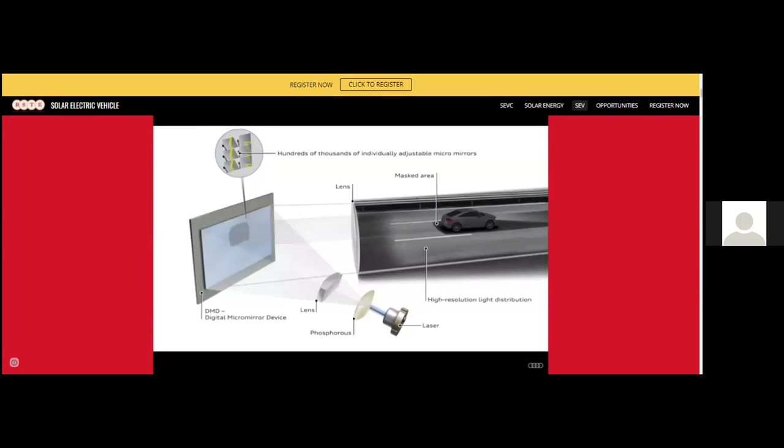Instead, Audi is investing in even newer, forward-thinking light technology: laser lighting. Matrix Laser Light takes the Matrix concept further by promising increased efficiency, precision, and road distance vision never before thought possible. While LED headlights have up to 50 segments to individually control, laser headlights can have over 100,000 individually controlled illuminated segments for ultimate vision.

Imagine not just being able to warn a pedestrian of the vehicle's presence, but being able to detect a potential outside hazard to the pedestrian and digitally paint a warning directly in front of him. That, along with doubling nighttime visibility, are just some of the ways laser light continues the Audi tradition of pioneering the auto industry.

This is the future illuminated. This is Audi.

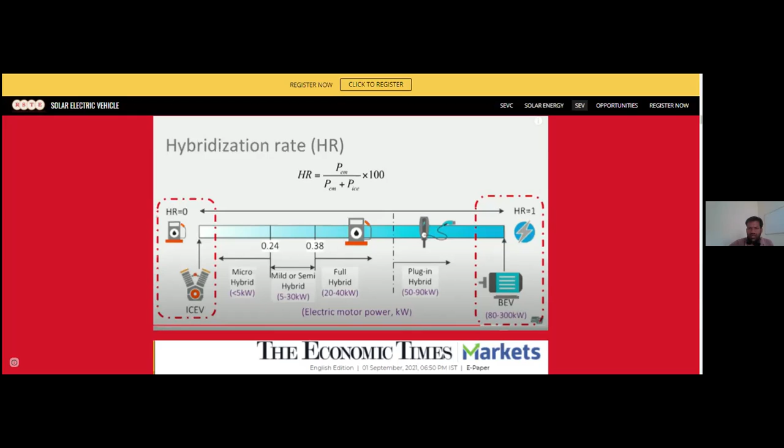I want you to know what the current crude oil prices are in the world market. Can anyone suggest to me? I am in the chat box. What is the current crude oil price? As I told you, I started my presentation with the current prices of petrol in India, so can anyone type in the chat box if it's open?

I cannot see the chat box. Till then, let me just take a cup of water. Chat box is open, yes. Can someone type the crude oil price? Crude oil price is 70 rupees per liter. Amit, okay, you are very close, but let me see some more answers.

Shall we continue without wasting time? Say yes or no, I need to check whether you are listening. Good morning sir, yeah Suresh is here. Good morning. Many of you fellows know me, so might be. Yes sir, we will continue. Okay so the current, good morning. Good morning, we got 90. Tejas Deshpande should be yes. Okay, just wait a while.

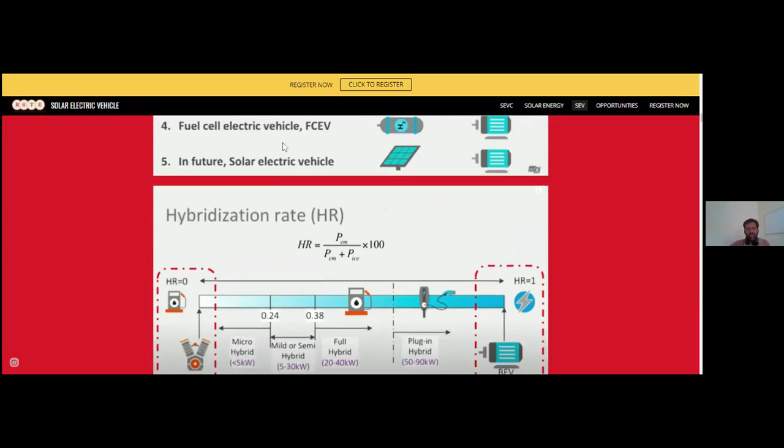We are starting with solar, that is my specialization. I've covered motor controllers in part, EVs and all, and after covering E-motors, I will cover the electric part as well. But we'll start with the future solar electric vehicle. We will cover this electric vehicle as well as solar.

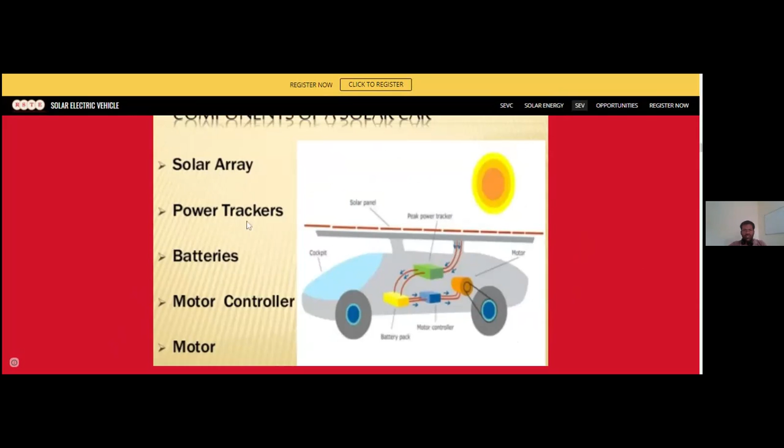So with this, I have covered the solar array part, almost with some calculations. Now we are moving slowly to motor selection. Motor selection will be decided based on the loads, and I have taken a reverse engineering approach - first we decide the solar panel, and then we decide for motor selection.

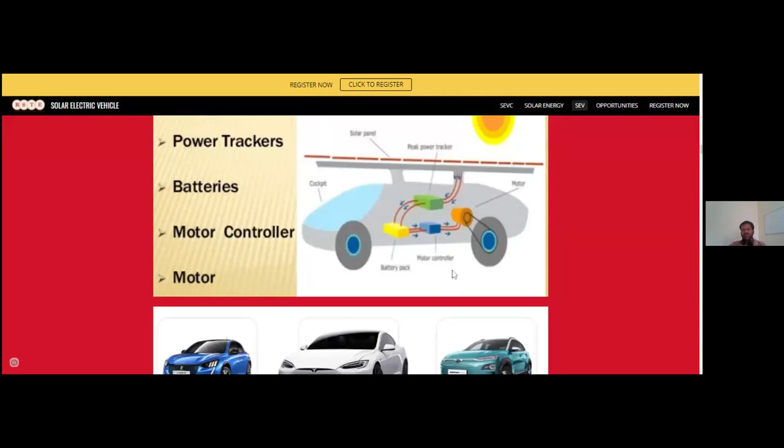So coming with this, I am giving you a quick example, but I have to ask questions from you, and lots of questions will be coming, and after that I will give you the answers. So coming with this, my second part is about to start. Before that, I wanted to take some questions from your side, and then we will move ahead, because we've covered almost 40 minutes.

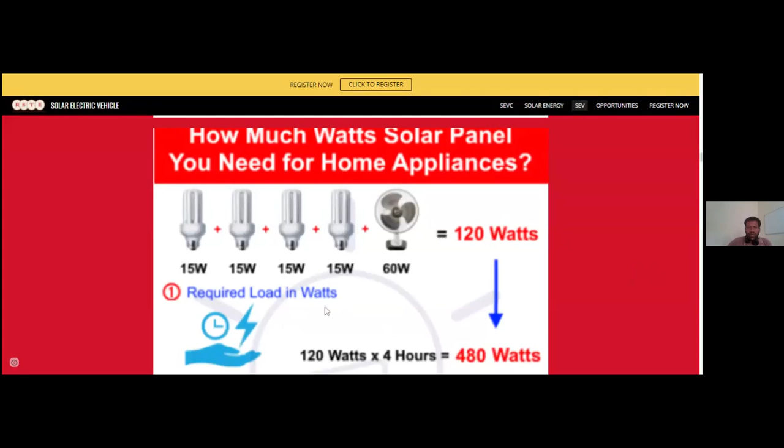Coming with this, the second part is required load in watts. If you have calculated, then you can see for how much duration that is coming in time-watts - how much duration we want this load to be used. I have taken an example: we are utilizing this for an average of 4 hours. So this 4 hours, when multiplied with the time, gives us the energy - there will be watt-hours. This is power, and this is energy.

Once you come with the energy, then we come with the energy balance. So coming with the basic calculation, 480 watt-hours is the energy part we need for 4 hours. We have decided our needs.

Then come with the solar part - for how much duration in your region the sun is there, and how much energy the sun is generating. I have taken some facts and figures, considerations in India, on what parameters we design solar power plants. So this 480 watts is again divided by the average sun availability of 6 hours, because in the morning or evening the irradiance will be less at that point of time, and we are unable to generate maximum efficiency through the PV cells.

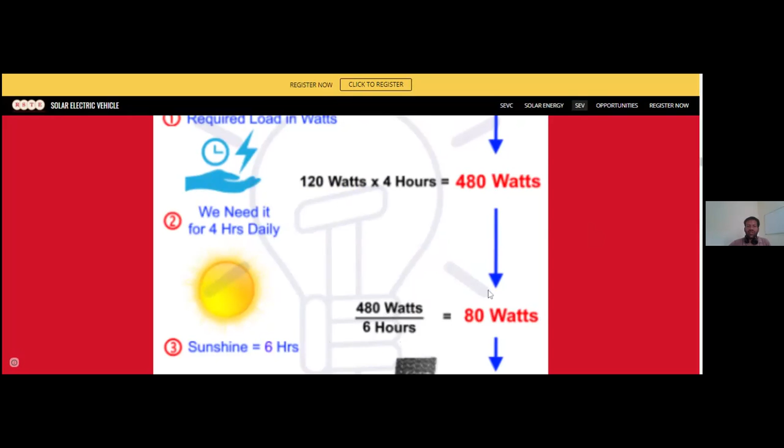As I told, the PV cells are designed on perfect parameters in STC, standard test conditions. So this 480 watts will be divided by the 6 hours, and this will give us 80 watts. So the third factor we considered is sunshine for 6 hours, and at the last we need an 80 watt solar panel.

This is a small calculation which I have taken for you, so you can understand and take out your own loads as well. You can design particularly how much solar power plant you need for home use, based on your load. You can give calculation for your fridges as well. I am giving an example.

If you don't want to spend so much on a survey, many queries come to me: sir, how many panels do we need for our own house? There is a particular device for the solar part called a current ampere meter, which can be utilized on an induction basis.

I will take an example. You can go to your electric meter part and check it out. Even on a monthly basis, you can find out how many units you are consuming, and convert them, since 1 kilowatt hour is particularly 1 unit. So from your monthly utilization, you can calculate how many watts of panels you will need for this energy.

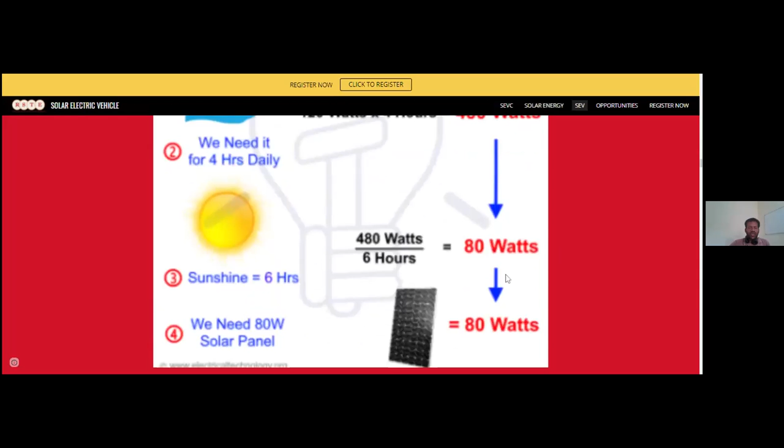The unit will be kilowatt hour, as household electricity is also measured in kilowatt hour, that is an energy. From there, you divide it by 6 and you will easily find out how many panels you are utilizing. So this is a very basic example.

What are the parameters you need to consider while designing? Because when the solar electric vehicle came, the most important factor was which orientation we need to adopt. Here, the power required for the entire orbit is 206.5 watt-hours. That is what we are getting in Earth orbit.

Then, the efficiency of the solar panel we are utilizing is only 0.18, as I've taken some assumptions here. The sun flux constant coming to the earth is 1367 watts per meter square. This is the radiation energy coming from the sun, an area where particular radiation reaches our earth, and we can utilize this energy in two sources: one is heat and another is light.

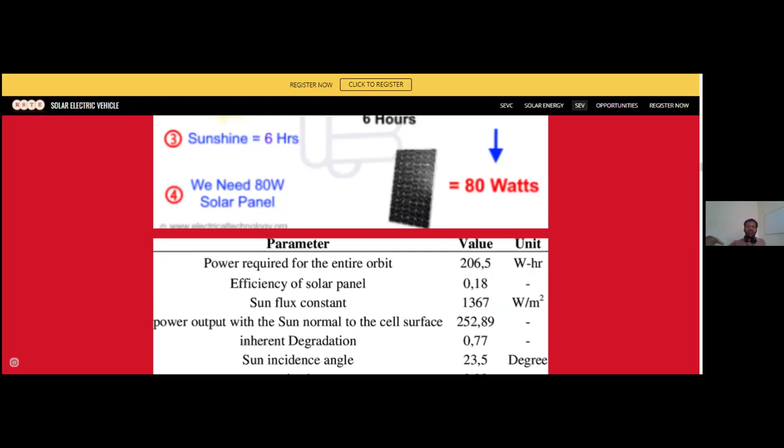In our EVs and solar electric vehicles, we are utilizing only a part as electric. Some solar electric vehicles utilize it as heat, they generate boilers in water, and after that run the motors. So both can be utilized, that depends on your usable part.

Power output with the sun normal to the cell surface is 252.89. So if you say power output with the sun normal to the cell surface, it means at 90 degrees this unit will hold. Inherent degradation, this is called the radiance.

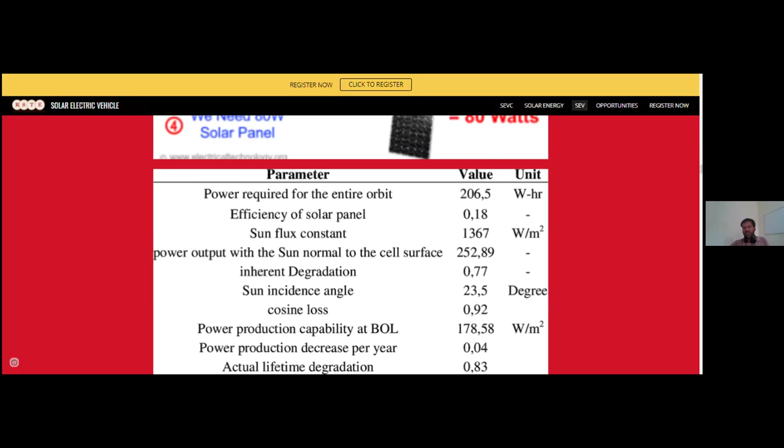Inclination towards the earth is 77. Sun incident angle which we have called is 23.5 degrees. Cosine loss, we have also gone with a particular factor, we call it 0.92. So if we incident at 23.5 degrees solar panel, as you see in rooftops or colleges, they generally utilize this angle because it's general in India. 0.92 is the cosine loss which has been covered.

Power production capability at BOL is 178.58 watts per meter square. This is the cell surface that is coming, and this is how we can utilize it for our services. Of this 178.58, 0.18 will be utilized, and that comes close to the efficiency of the PV cells we are utilizing.

Power production decreases per year because every year the temperature is increasing, global warming is increasing. As I told, these are decided under STC, standard test conditions. Now the normal temperature comes up to 30 degrees Celsius rather than 25. We utilize ACs and all, but that doesn't matter, the global warming temperature will become 27 to 28.

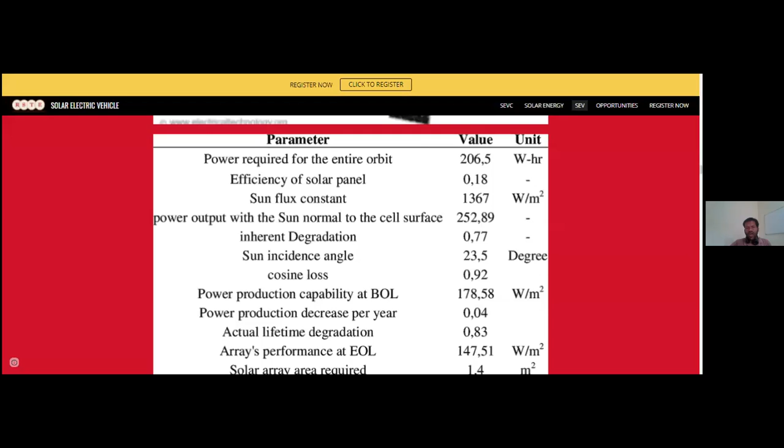So we are increasing it, and that's why power production - the PV cells will be very much heated, and it is also a problem for solar power plants. So we are decreasing by 0.04. Actual lifetime degradation is 0.83, because when a solar panel is designed, it is designed for 20 years, so year by year efficiency decreases and degradation will be 0.83.

Array's performance at EOL is 147. When PV cells are connected together we call it an array, connected with bus wires and fuse wires - these are thick wires which connect the solar cells. They come with 147.5 watts per meter, and the area required will be 1.4 meters square. So for 80 watts you need at least 1.4 meters square area. These are the types of factors I have taken in these calculations.

I hope this gives you a little information. Now let's come to battery life calculations. Battery life calculation is very much easy, I have not gone into depth on that. So you can design the solar cell this way - as I told, in all EV design, motor selection, battery selection, and solar selection, we are only balancing the energy.

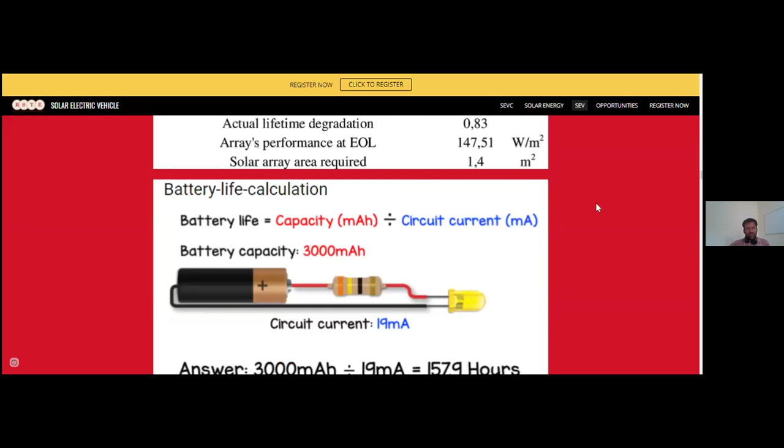Currently the trend, as you see, is thermodynamic first law - I've taken an example, so you can see we are always balancing our energy. Coming to this circuit current in milliampere, we are taking 19 milliampere of current, and a 3000 mAh battery capacity will stand up to 157.9 hours.

Battery life calculation is decided according to how much current your motors consume, and how much capacity your battery has. From this you can easily find out for how much duration your vehicle will run, and the motor will run on a particular power into hours - here you can find your battery can sustain that much current consumption up to 157.9 hours maximum.

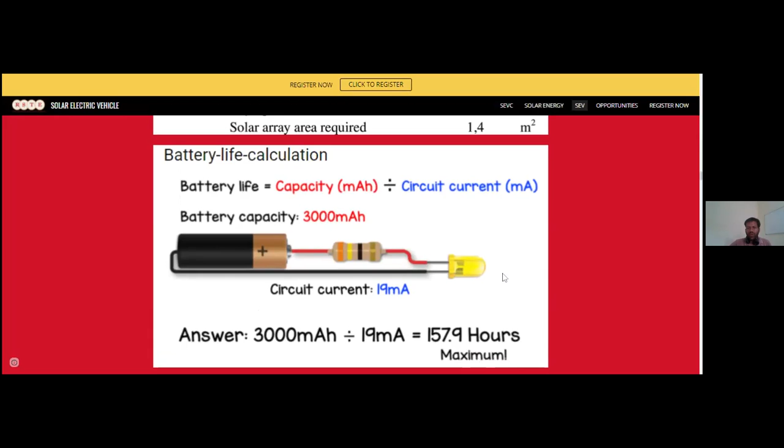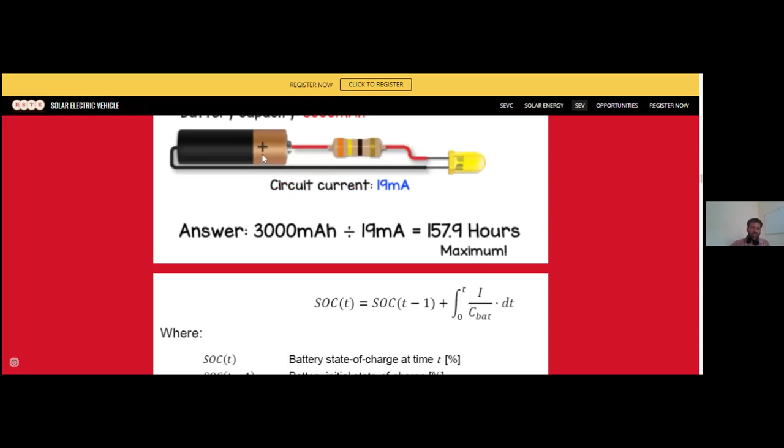The formula being utilized is SOC - we need to find the state of charge at a particular point in time, and SOC at t minus 1 is the initial state of charge. If a battery is 100% charged, we take it as 100%; if it's 80%, we take it as 80%.

So to find the point of charge we use the state of charge concept, and it depends on I, the charge and discharge current. As you see, load current is 19 milliampere - this diode uses 19 mA, so I have taken I as 19 milliampere. This is battery capacity in AH - here battery capacity is 3000 mAh, so you can directly use 3000 mAh.

Utilizing the time factor DT, time in hours, you find it through integration - you need to find these factors on a time basis, so that the state of charge is calculated and displayed to the user on your phone or display panel, showing how much charge is left in your vehicle.

These are some of the basic calculations for EVs or any vehicle which I have covered. Here I have not utilized PCM - PCM is a factor where you need to design the vehicle through its power as well as the curb mass. It's only a ratio - how is the ratio designed? It means the total overall weight of the vehicle without passengers, or as the vehicle is designed.

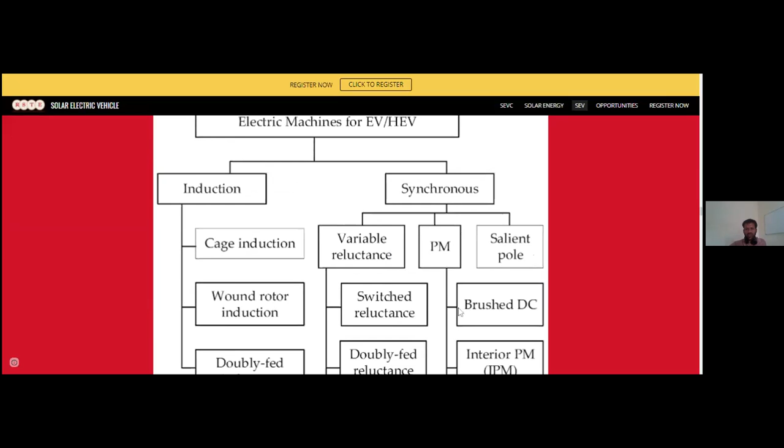So induction motor comprises of cage induction, wound rotor induction, doubly fed induction. Then synchronous motors comprise of variable reluctance, permanent magnet. Permanent magnet has been further classified into three parts, interior permanent magnet, inset PM, and surface permanent magnet. Whereas variable reluctance motors, I will tell you in the later part.

I think switched reluctance is now also in a research phase. Many vehicles are now searching for switched reluctance. Then we have doubly fed reluctance, synchronized reluctance, and hybrid PMS.

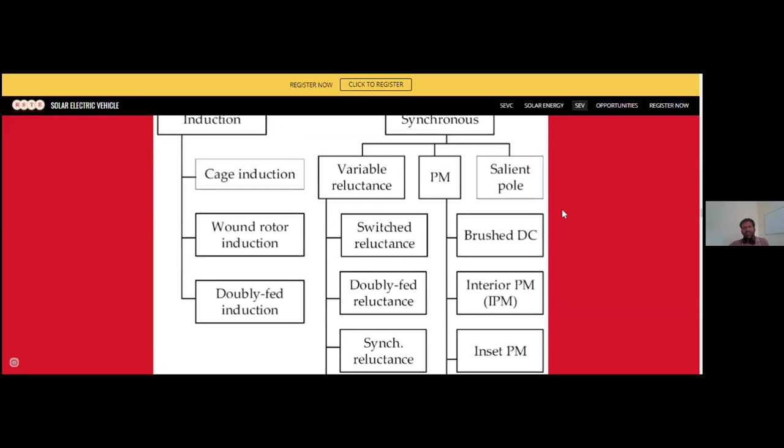Then I have not taken the BLDC, brushless DC motors, that we cover in the motor part, and that you can find down in Ola electric scooters. In any of the EVs, you can see electric BLDC is currently utilized. So that's why I'm not taking that part.

Different types of electric motors used in current EVs are, as I told, first and most important is the brushless DC motor. Why is it being used? What are the advantages you can find from various YouTube videos? But I am just giving you an overview.

Second, permanent magnet synchronous motor, which is also very trendy. Tesla also utilizes some AC induction motors because they are very good in efficiency, and cost is also lower than DC motors.

Then we utilize interior permanent magnet motor, that will be in go-karts and all. We are utilizing interior permanent magnet motor. We are using natural metals, right?

Then we have permanent magnet switched reluctance motor. As I told, this is also a future possibility, might work out or might not, but currently this is a very trendy motor. You can go to market and say, sir, I want a motor, they will only give this BLDC. How the circuit will be done, how a phase wire will be decided, you can go for that.

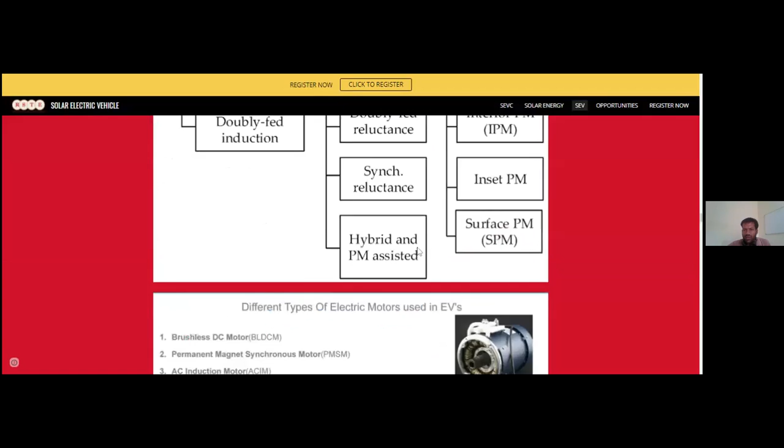It must be 480 watt hours. Gaurav is saying for the calculations. Just wait a while. Yes, 480 watt hours, yes yes, I think that is correct. 480 watt hours, hours have not been mentioned.

Can we install a solar system in apartments on a common terrace? Can any issue be raised by the apartment committee? Is it right, Ramesh sir? Let's see about the solar system in apartments.

So apartment consists of flats or duplexes. Initially at your house you can install it, and there is a particular ministry that is going to do a survey. They will come to your home and check whether your apartment is fit. Generally, the requirement is that there should not be any tall buildings nearby so that the area is free from shaded regions.

Second, in your region, like suppose a coastal area, if you are installing the solar system, it may get damaged due to rusting.

And regarding any issue raised by the apartment committee, that completely depends on your committee, as I told you. I haven't found this issue in many of the duplex committees. I am also residing in Windsor Beach, and at that point of time I could see many persons utilizing solar systems. So there is no legal formality as such, but many societies have their own presidents and vice presidents who take care of maintenance in that regard.

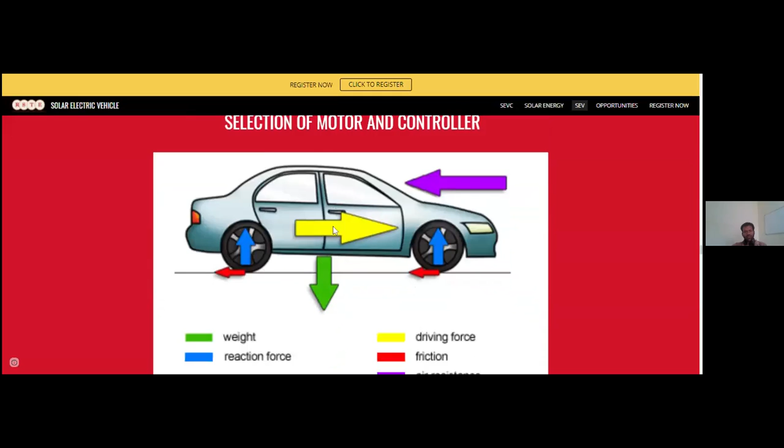Coming to this, I hope you have already taken a glimpse of various aerodynamic forces and factors, but I have only covered a few of them. So weight is the major factor in vehicle design, and once vehicle load is decided, the motor will be selected. Then we have reaction force, driving force decided through motors, friction force from the road and tires, and air resistance.

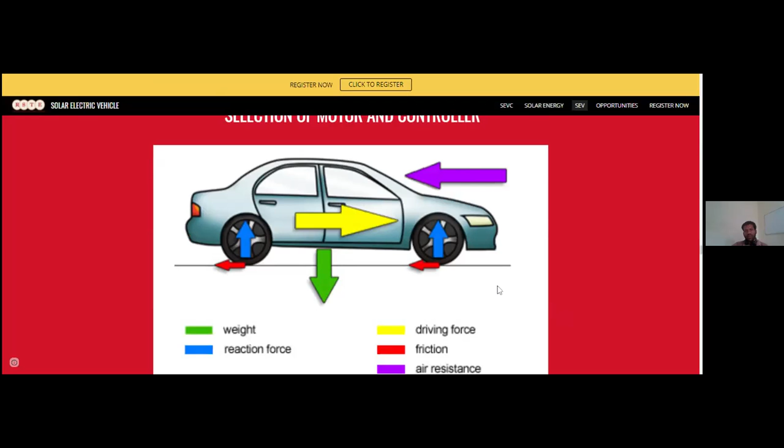So these are the five forces we consider while designing the motor. Once your load is calculated - I hope this was already covered in the aerodynamics section since I see it in the itinerary, so I have not given the calculations here - I am now strictly moving to the motor part, how it will be decided.

As you see, this was the basic setup. Right, as you see, the motor is the heart of the EV. It is charged and it drives, particularly converting electrical energy to mechanical energy.

Basic definition: we have two components, the rotor and the stator. This rotor and stator are connected to bearings, and the bearings move to the transmission, right? So this is how we design the motors, and motor selection affects this. This is a very basic diagram for the motor I have taken.

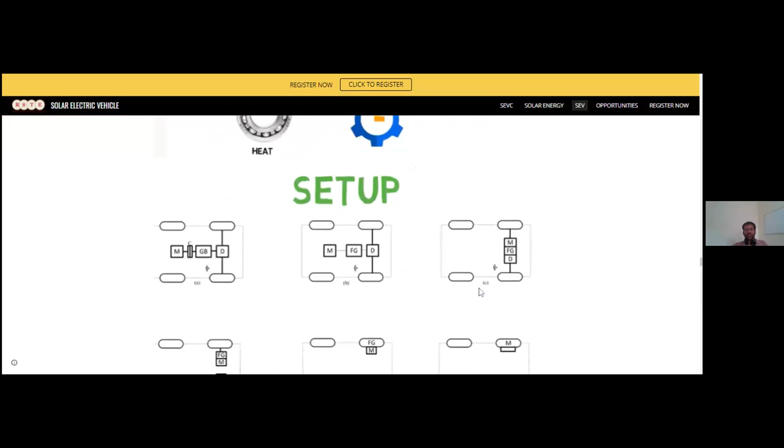Now coming to this, how the setup is generated. I think Gaurav's question will be answered, about how many motors we are using. That depends on vehicle usage. Currently we have 6 types of arrangements in vehicles, which you will find out.

So the first arrangement is this: motor will be placed, then clutch, then a gearbox and a drive shaft. This is the first setup for an electric vehicle, right?

Second setup, let me enhance my screen. Okay, in the second setup, motor is placed and we eliminate the clutch, and then we have a fixed gearbox and drivetrain. You can see it here. The benefit is eliminating the clutch part - this looks like a scooty wheel, the drivetrain is automatically controlled, transmission parts are reduced, and weight is controlled.

The third part is front drive vehicles, like many Renault and new electric vehicles you can see. They are integrated where the motor engages with the gear shaft, and then the drive shaft connects. So these are the three parts as I told.

This is a modified version where the motor is utilized in the midway, but here we only take the front part. As you see, hatchback cars and latest technology are using these types of arrangements.

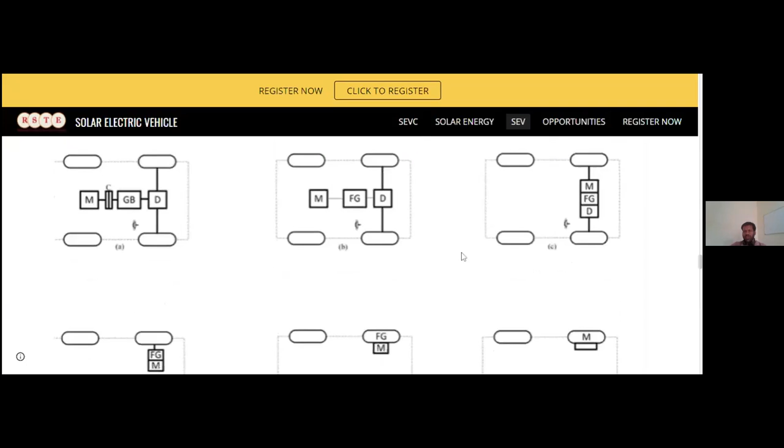Then we have the individual motor concept, where an individual motor is fitted in each wheel, with gearbox transmissions and FGB. Now, in a trendy way, you will find BLDC motors coming into play. These are individually BLDC motors fitted in the hub itself, controlled through electronics. This is a very trending approach.

It reduces almost all the parts in existing automobiles. The next part is the motor, as I told you. The last arrangement is where the motor can be utilized within the wheel itself, without a hub. It is a motor with a particular wheel, built into the wheel itself. We call it a wheel hub motor.

Coming to the first one, this arrangement has motor, clutch, gearbox, and drivetrain. Efficiency is very low here because most of the efficiency is wasted in the clutches and gearbox. But the advantage is in torque and speed adjustment - torque will be very low and speed will be very high.

The torque will be distributed here, and it can be manipulated. The biggest advantage in this arrangement is that you can manipulate the torque with the speed. When speed is less, you get high torque.

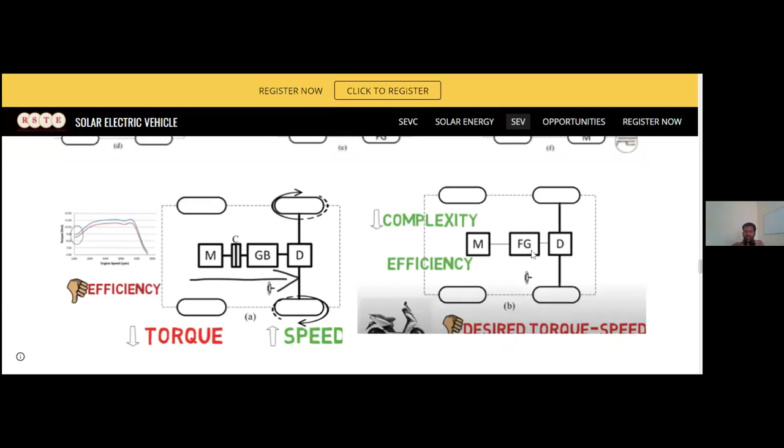Then comes the complexity factor. It has been reduced because here we have removed the gearbox and only the fixed gearbox will be utilized. Here, the desired torque and speed cannot be obtained and manipulated.

Third part, as you see in Toyota and other companies, they are utilizing the motor within the connection part and then the drive shaft, which is the front end gearbox. This part can be utilized in a drivetrain where the steering is done. So here both wheels will be in the back end and no other parts are required. Then it comes with the individual motor system, where a gearbox is fitted with a motor, and then wheels will be connected.

Here all the parts will be controlled through electronics, and speed and torque can also be varied, but the complexity is very high. That's why it is not really used much - the most usable part is this one.

The last type here has reduced the clutch parts as well. This is a modified version. Here we have used the motor part and gearbox part, and it directly runs on the wheels.

I've taken some factors into consideration. So what things are considered while selecting a motor? Three things: maximum efficiency we can get, and low cost that we want.

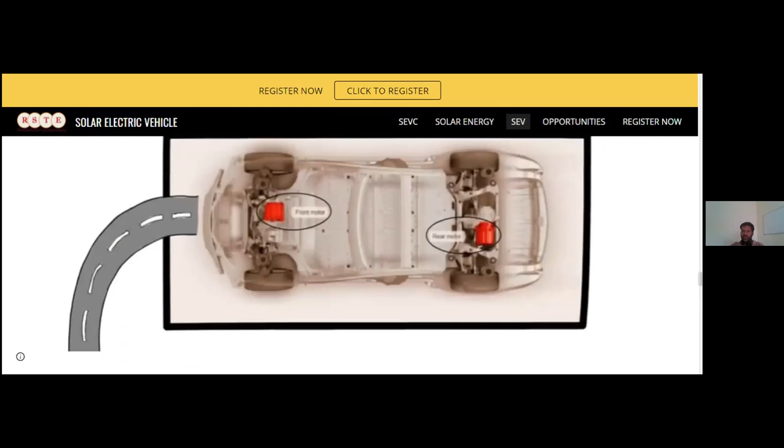The first two most important factors are torque and speed, torque and power. Torque will decide the motor. AC induction motors have less power but greater torque. If we compare, AC induction motors and DC motors both have power ratings, and the speed and torque can be varied accordingly.

Second parameter is power. While deciding the power of the motor, you can find the torque at a particular RPM - I covered this in the motor characteristics curve part. When you go to purchase a motor in the market, you will find a specification list. You need to check what is written: first, the torque rating at what RPM it gives maximum torque, and second, how much power is rated, typically in HP.

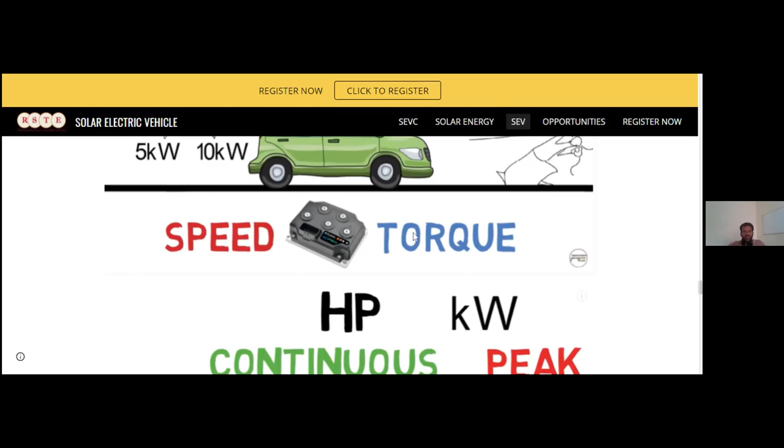Controller here, the parts will keep speed versus torque. They are maintaining speed and torque. Now you will find out all the things. Motor controller is being now replaced by vehicle control unit. So we are having continuous and peak.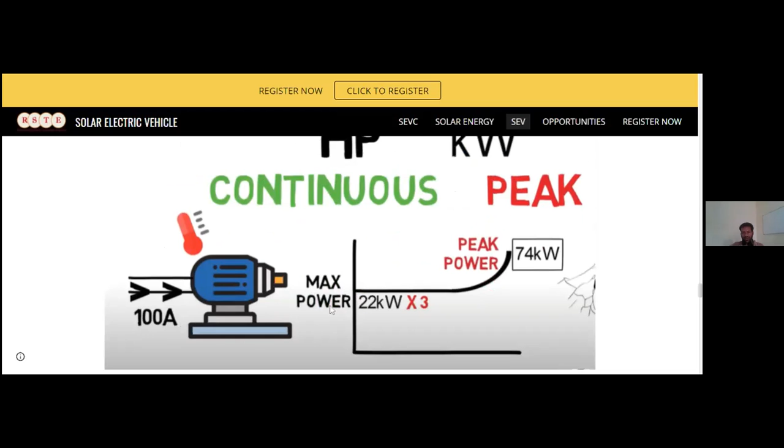Let's come to this motor. It is consuming the current for 100 ampere maximum power. So 100 ampere motor is consuming this. Then we call it 22 kilowatt motor we have utilized for one vehicle, and when it comes to the peak and the loads come, it can reach up to 74 kilowatt. So you can see up to 3 times the peak power will be done while designing the motor, so that their coils and all will not burn.

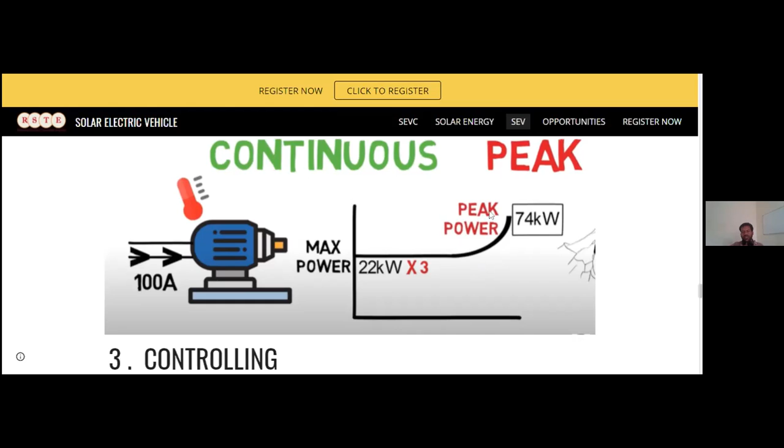But if you are running continuously at this peak power, this will be so much heated and motor can be busted out, which will be controlled through controllers.

Two factors I have taken are torque and power. And the basic factor which we think controlling should be very much easy while designing the motor, and that depends on the controllers. Generally BLDC is taking care for that. Second is the efficiency, how much efficiency we are having. BLDC is having much more efficiency rather than brush DC.

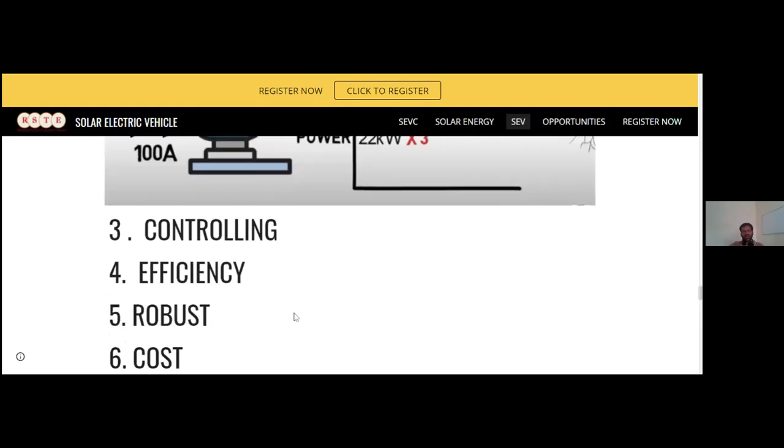Then we are having robust designing, because if you are using in automobiles, there can be accidental chances. So motor cannot burst, it will be hurt as I told. As an IC engine, particularly all things will be replaced. So we can also do replacements in EVs. Robust designing should be there.

And the last and the most important is cost efficiency. So as I told, if your engine cost is 1 lakh, we will try that all the systems will be done this way. Why are EVs currently higher rate? Because designing the EV is not a bigger deal. They can be at a lesser price as well, but the battery pack has a very high cost.

Although if you can compare the electric scooter to particularly gasoline bikes, you will find their price is less compared to gasoline bikes. But for passenger vehicles, a larger battery pack will be needed. At that point the price will go beyond.

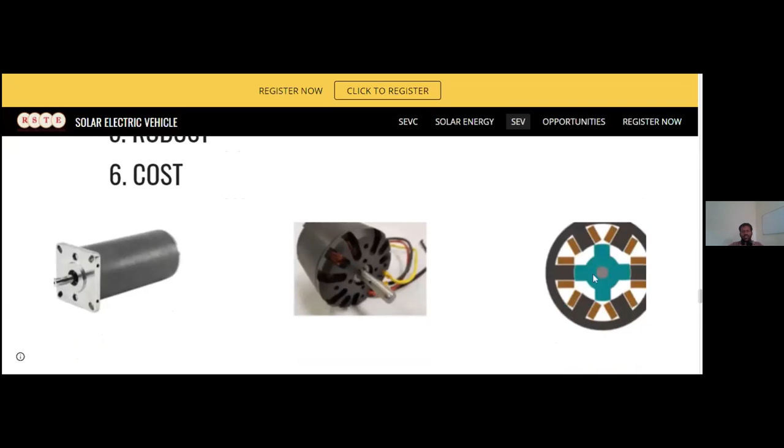Some of the motors I told about: these are DC motors, these are BLDC motors, and this is a switched reluctance motor. I have taken examples. This is an AC induction motor, and this is a stepper motor. I have taken a few examples, and here you will find some of the examples which I have taken.

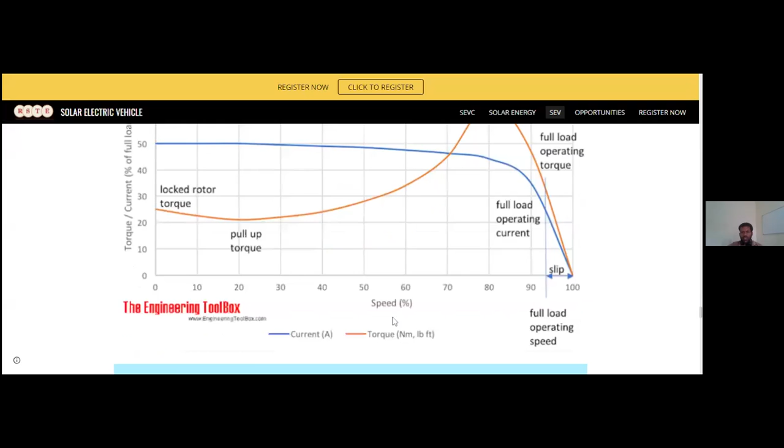So you can see torque will vary, and once torque varies, the speed - this blue chart - will be coming, and this is the amount of current consumption. So at a similar point of time, when high current is required, you need locked rotor torque, and when breakdown torque is given, the current will be much less. After this, it becomes full load operating current and full load operating torque. These are the two curves I have taken for you. Speed can be varied from here, and once speed varies, these are the changes you find in current and torque in the motor. I have taken these references from an engineering toolbox.

Coming to this, how will the controller be done? I have covered all the parameters of how motor selection is done. I hope it is clear to you. Now we come to the speed and torque part.

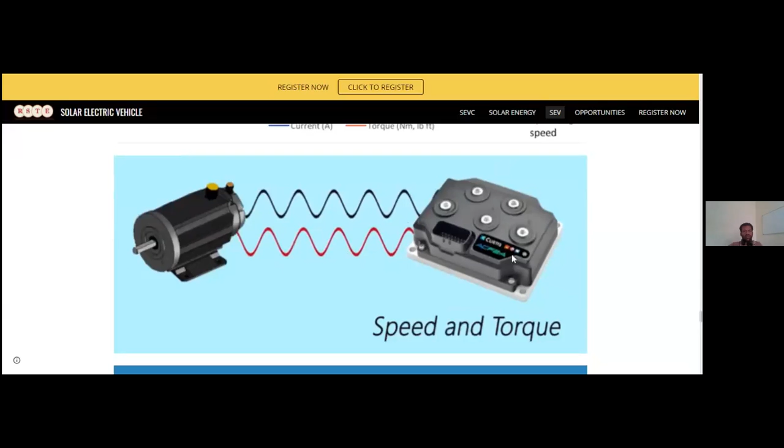As in vehicles with gasoline engines, the IC engine controlling part is done through ECU, engine control unit. In electric vehicles, we control through VCU, that is vehicle control unit. They generally control the speed and torque per motor. Basically it is designed for this, but now they are very much advanced and control all the vehicle functions. I will cover it one by one.

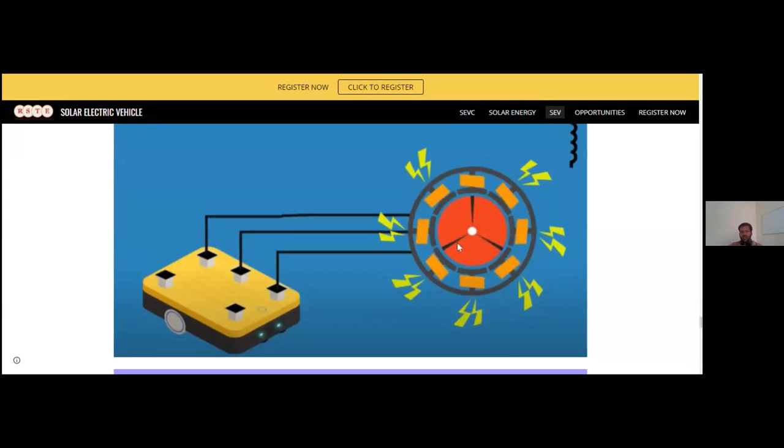So basically this controller comprises of sensors, microcontroller processors which control the motors. As the motor generates electricity through permanent magnet and induction motors, for controlling it a small amount of current will be given. So they call it phase wires, which will be connected through this. I am covering this part for BLDC only.

These two terminals will be given for charging and connecting through batteries. So the controller is controlling this - this is the motor controller which is controlling and giving the charges as well, and the battery is running that. Then we have continuous - as I told, the three phase wires will come.

And how can we particularly control our automobile through the accelerator? The accelerator is nothing but a variable resistor, where the resistance is varied accordingly, and the inputs are given to microcontrollers, through which we control the motor. Some codings can also be given, like an AI, where we design overload current and overcharging current protections, so that the motor will not burst and will be controlled in a precise way.

Coming to this part, as you see, when the microprocessing is given, then the battery part also comes in. So the battery's current will be here, and it is particularly utilizing a state of charge, and this can be connected to the controller, and three-phase wires are utilized for the motors. I hope till now it is the basic concept I have covered for the controller.

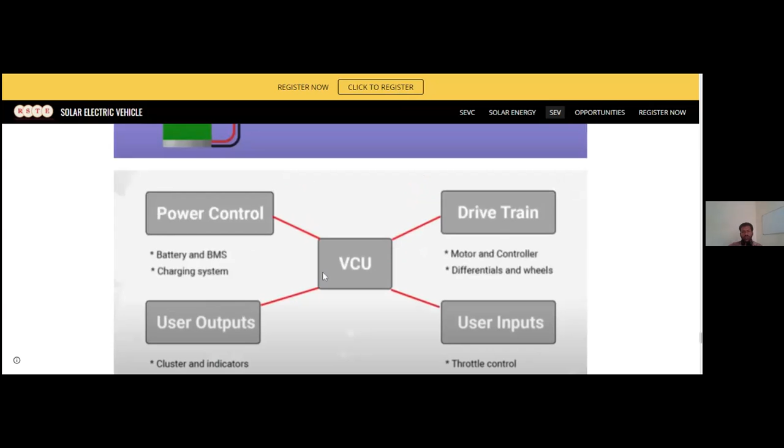Drivetrain instead of motor and controller, and then we have differential and wheels. So these are now, as I told, motor controller being now replaced as a VCU, and they totally control the vehicle. That is the brain of the vehicle. How it looks like? It looks like this type.

It can be utilized in e-rickshaws. You can easily find it in the market. These are the lots of wires which are coming. I will just give you a demonstration. This is the heat sink, so this is an air-cooled motor controller. We are also utilizing liquid-cooled motor controller when we are utilizing high power things.

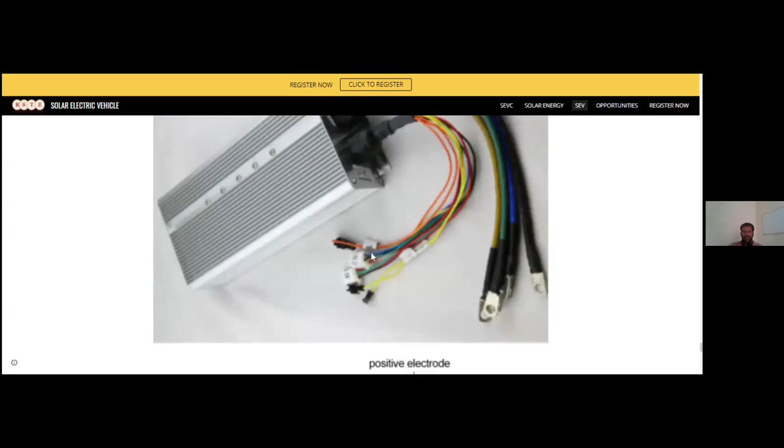Moving ahead for wiring diagrams, if you are utilizing for electric vehicles, then the wiring diagram is coming. You see the red part, positive electrode for battery will be connected. It is an ABS brake system, you can find it out. Regenerative braking system will also be utilized. Then we have intelligent identification system where it automatically reads the pattern of your vehicle.

So you can see how much VCU will be developed. Then we have a low potential brake. We call it a brake system designed on EBS and low potential. We are having electrical lock, that we call it charging, mobile charging, particularly key controlling system. We can see now the wireless key has been adopted, so through there we are stopping the motor, particularly done through the motor.

Then we are in reverse function, so here it is the motor part. Biggest advantage in these EVs is that you don't need a separate gearbox particularly for reverse. You can do it from the controllers only, so that you don't need extra arrangement for reverse and idling gears.

Then we call it alarm power supply. Some of the alarms which are also developed means, let's say if the motor is being utilized for high current, some drawbacks are coming. So in the drawbacks, you can see these things going on. Then we are having high potential brakes, and high potential brakes we can see the things as well, and the things we call it going ahead in this way.

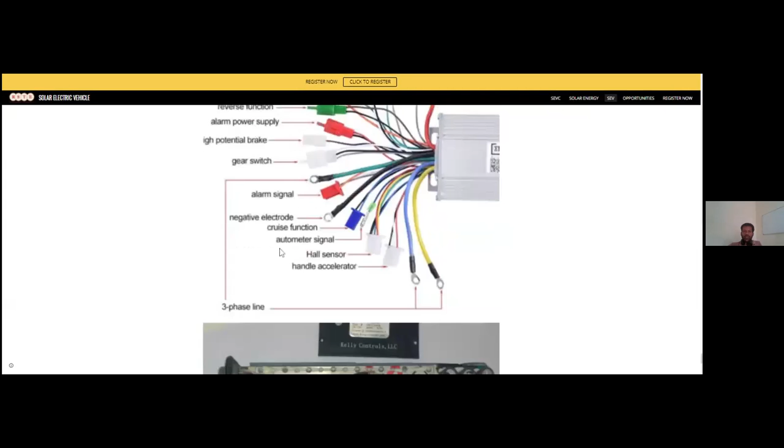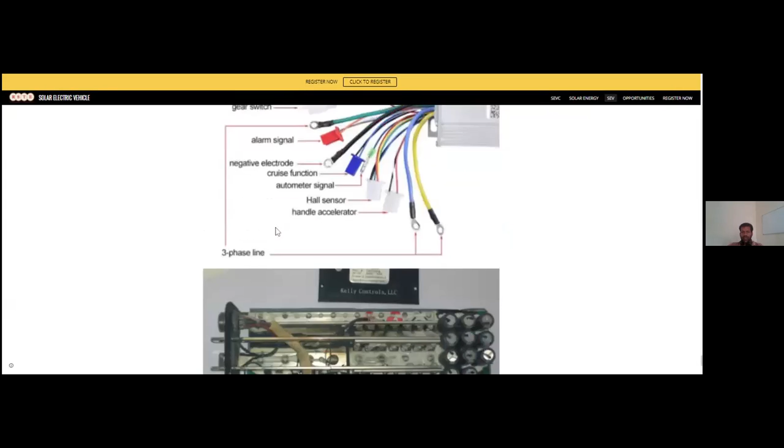How will it look like inside? As you can see here, MOSFETs are being introduced. These are the wires which you can see, these are the many wires. As you can see, two wires which are coming, first and second. So opening this, you will find these types of things, 1 and 2. And here you will find the major ones which are connected to phase wires and batteries, these are the 5 wires.

And here you have the electronics that will come with Hall sensors and the controlling unit. Microprocessor will also be there, and there is a Kelly controller, and MOSFETs will be decided as per the MOSFETs, that controller pricing will be reached.

So this is about my part till now so far. I hope I have given you maximum knowledge. Coming to the last part, let me take some of the questions.

There is one case study, that is Audi A3 e-tron, and we will try to go on for that. Shall we go ahead for the same? Because I am on this part, I have not taken the questions.

Any questions from your side? This recording session, now many persons will be disconnected. Sometimes it happens, same problem, sir. Okay, shall we move ahead? Questions are not there?

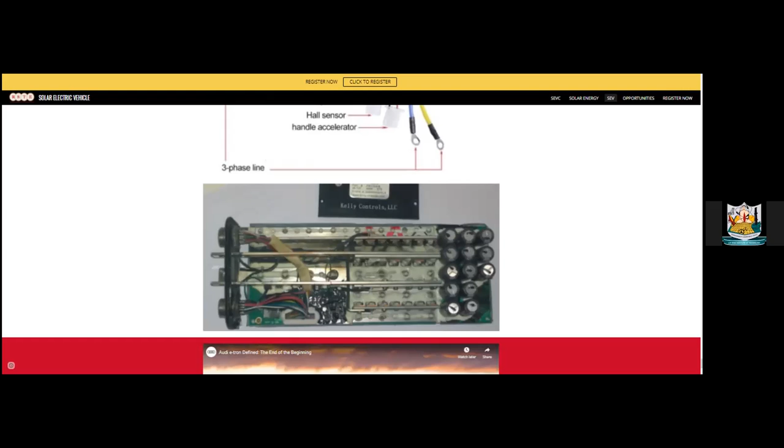Yes, sir, sure. So now covering the last part, that is an Audi A3 e-tron. Let me quickly connect with this. I cannot share with that my presentation that I have taken with an SSP.

So this is the SSP, you can also download it from Google. That is the Audi A3 e-tron, right? So this shows how the A3 e-tron will be developed and how things will be done.

I'm covering a quick glimpse of what I have teased you, which is already being utilized in industries. As you can see, this is a particularly hybrid electric vehicle where motors are integrated with engines. So engine is there, motor is also there, and that is a plug-in hybrid.

Contents are very much huge in there, but I have covered only the batteries part, that is the high voltage batteries part. And if you want much more in that, I can give you a demonstration.

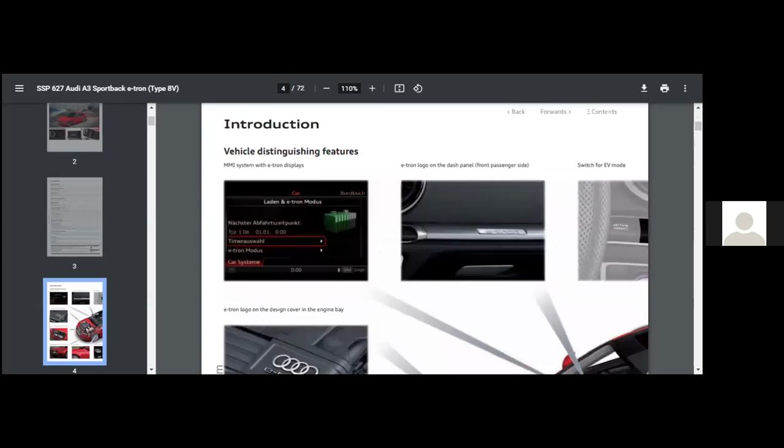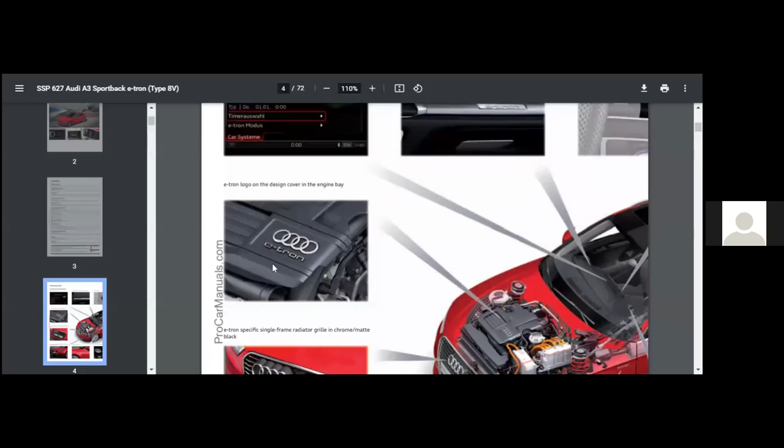Coming to basics, as you can see, for vehicle distinguishing features we are having Laden and e-tron Modus, with the e-tron logo on the dashboard panel. So these are some of the glimpses for that - engines, and these are the frontal parts. As you see, these are the front of the vehicle, and the charging port is given just there.

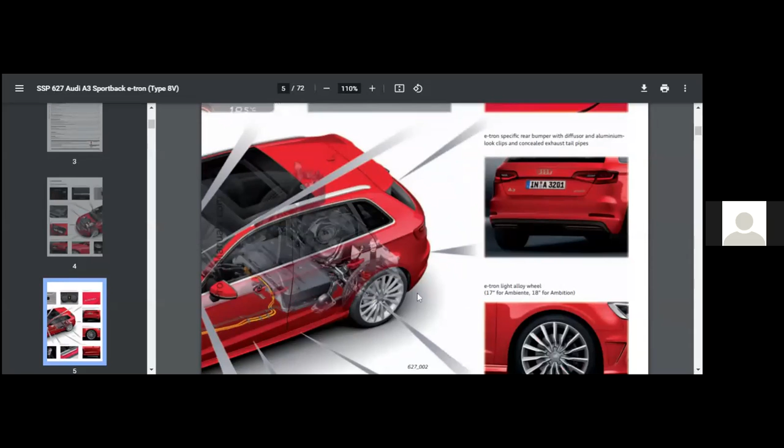Instrument cluster, you can see easily, speed and RPM. Here you can find out the charging state of the vehicle, and the instrument cluster will be designed accordingly. Various circuits and programs will be there, which I will cover.

In brief, dimensions are there. As a tool while designing EVs, or selecting any motor or particularly a controller, you need to first find out the mechanical layout, right? For watch, how much things will be going on, how aerodynamics will be decided. After that, you will be designing the electrical part. That is a good technique.

And currently, you can see retrofitting concepts are also coming, meaning old vehicles are being retrofitted into new electric vehicles. That is also good. So once you decide the mechanical structure, then you can move ahead for this.

Dimensions you have calculated, right? All the dimensions part. Here you can see the plug-in hybrid PHEV lithium ion system they have utilized. Total capacity in kilowatts is 8.8, right? Total speed in electric mode only is 130, and total speed is 222 in this.

And I just work on that, that's why I'm having some of these parameters and all. Acceleration, as I told, while designing the motor you need to decide - they previously decided how much acceleration we need, and how much we are getting, that is the final one, right? So 0 to 60, they have decided in 4.9, and 0 to 100 it is set for 7.6.

Then you can go ahead for another system. These are the dimension parts. Kerb weight here we have taken as 1540, and gross vehicle weight along with the passengers we have taken as 2050. Fine. Fuel tank capacities and all will be there.

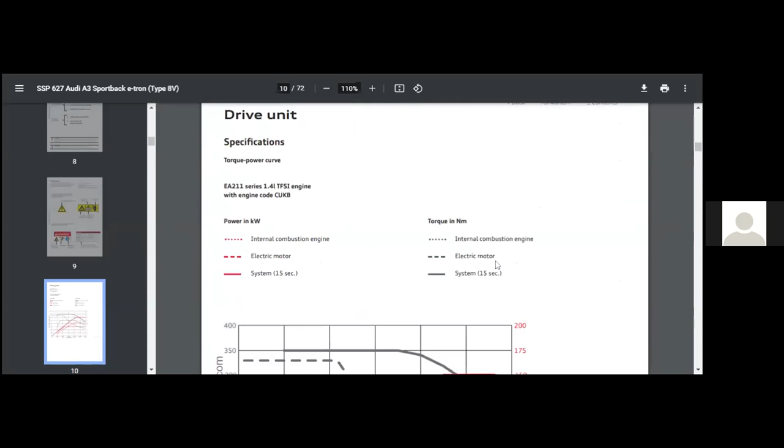These are the same signs and symbols you can utilize while making the higher components, so these are the industry trends. Here we also see characteristic will give engine speed along with, as you can see, these dash lines will be an electric motor. The maximum motor reaches will be 75. This is the motor power, and these dotted lines are comprising of it.

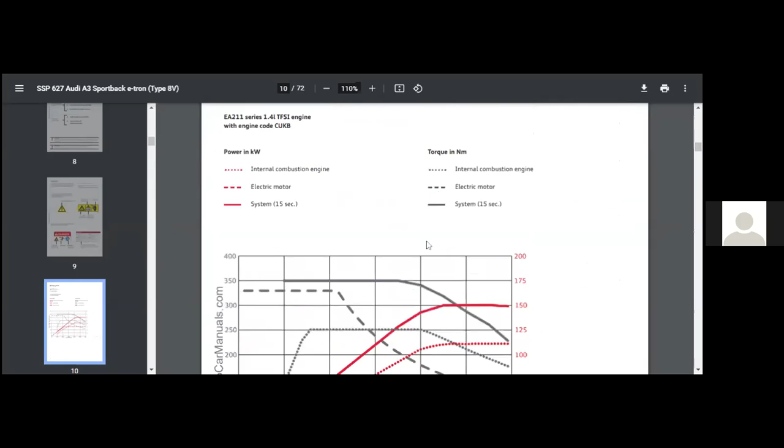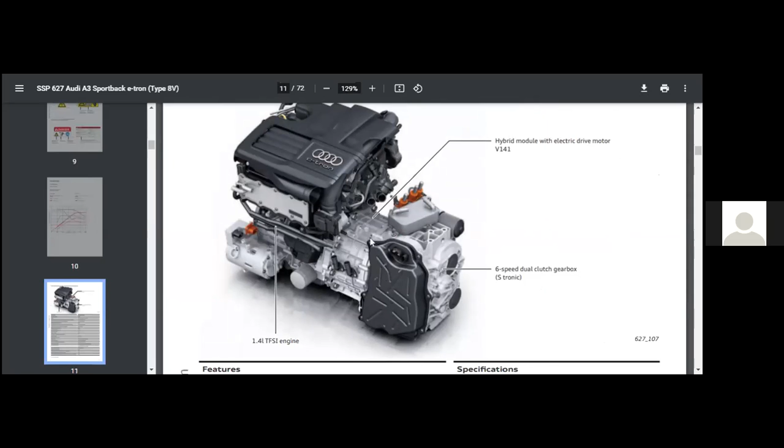Internal combustion engine and electric motor with gearbox. As you see, hybrid electric motor, they have used it with the engine gearbox, and here you will find the hybrid module with electric drive motor. It is being designed and integrated with the engine and drive shaft. So this is a complete demonstration which is fitted in frontal drive.

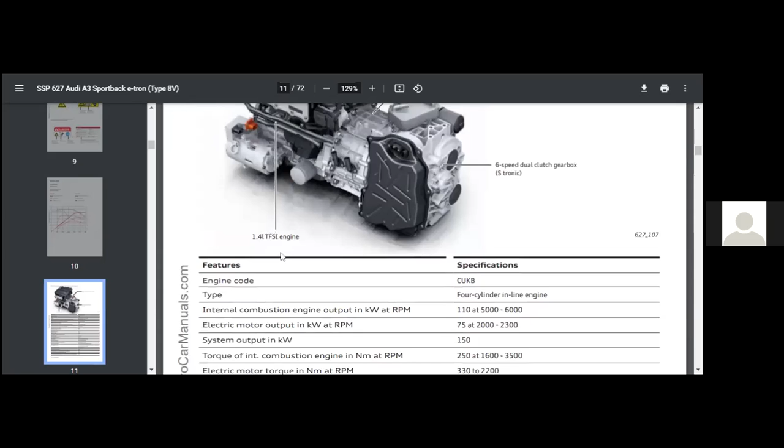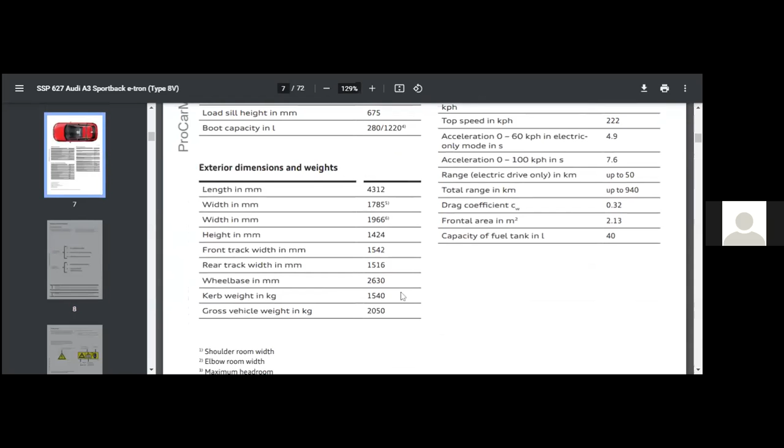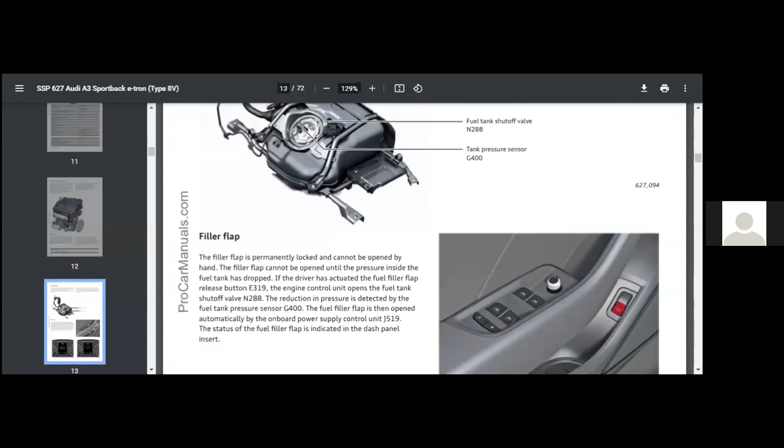This is a very simple calculation you can also do from your side. These are the torque figures. System torque in Newton meter is 350, and displacement we have given. Internal combustion engine is being utilized. This is only an IC engine, I am not taking it apart. Fuel system we are having, this is completely particular to hybrid, so I'm not going into detail, this is a very detailed one.

This is the SSP. If you want, I can also send it to you for persons who want to study it.

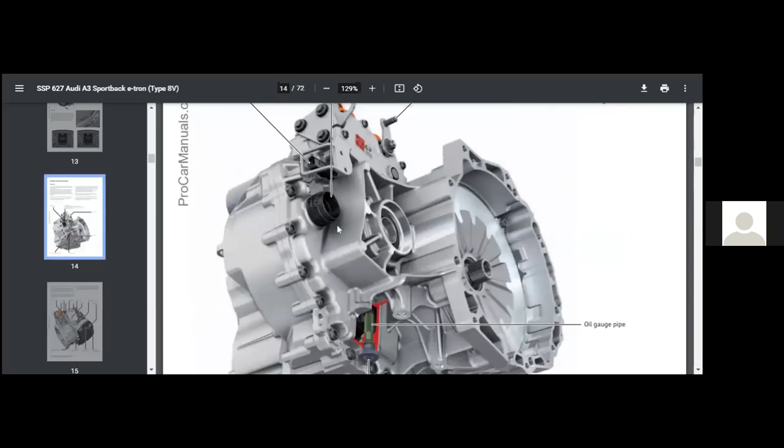Here we are having this part, then particularly this is the mechatronics part which is being utilized after this part, for power transmission. The mechanics part, EF controller part, all gearbox will be done. Mechatronics is particularly electronics which is being utilized for controlling the gearbox, because in high speed vehicles you can see these things will be done.

Then comes the gearbox modules and hybrid, which is for our purposes. You can see how the motor is being integrated here, and this is the coolant tubes, because this motor is very high power, 75 kilowatt, so for that cooling, an extra cooling system will be utilized. These are particularly P4, P5, and P6, the switches which are utilized to control, and the manual gear is attached with this.

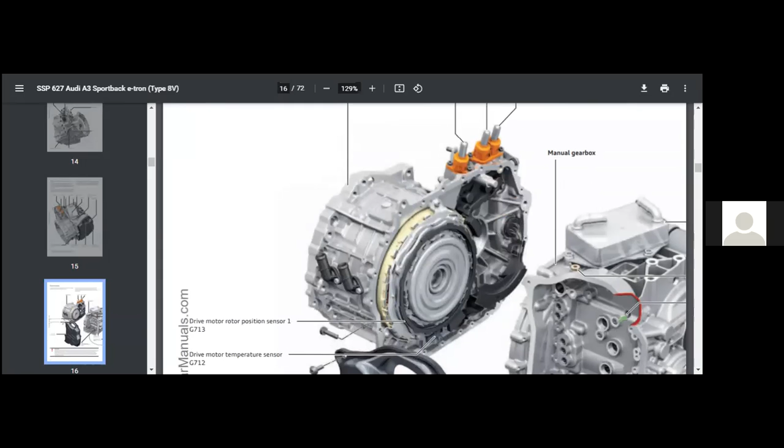These are the position sensors, utilizing the temperature. One is for temperature and one is for rotor position that we call Hall sensors. Then we are having dual clutch. These are the mechatronics which is being presented here, and can be used in this part.

Particularly you can see the gearbox input speed sensor. So in the gearbox, you can see in the instrument cluster, if you run particularly now vehicles, they can also show you that along with the speed they are indicating that please upshift your gears, please downshift your gears. These features will be utilized and mechatronics will help you, mechatronic unit for dual clutch box.

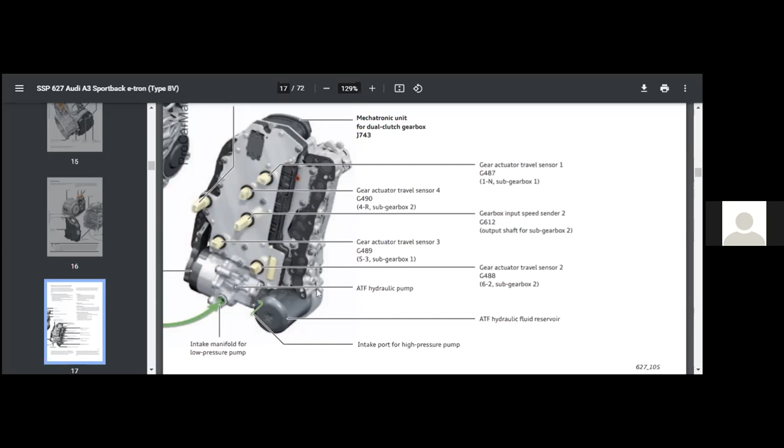And then particularly Audi, they are running through sensors and particularly AI and modules. In Audi A3 e-tron, as I remember, it's almost having these types of mechatronics units, electronic units, particularly 70 to 80 units they have installed for different sectors, for doors, for steering, for gearbox, for other types of things, and they are utilizing these types of mechatronics.

These are very advanced. And then coming with this part, electric drive motor as I told, so how is it being connected? This is a cooling jacket with the upper part. This is motor one integrated with the IC engine.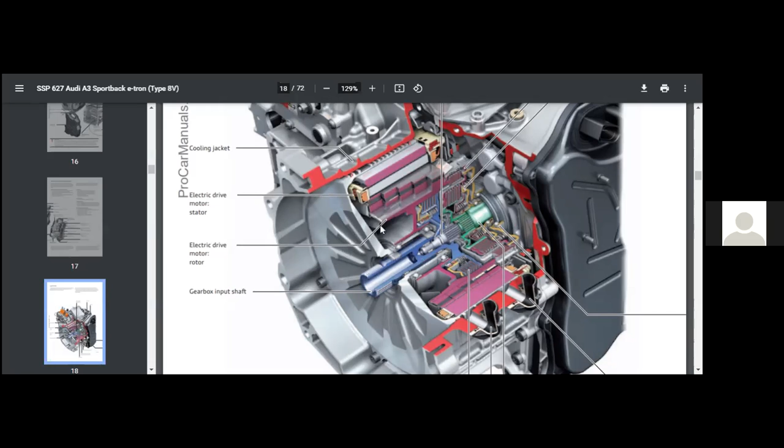Then electric drive motor, this we call the stator. Stator windings will be done. Then we are having electric drive motor rotor, that is there. So stator is the upper part, and the rotor is the below part here. Sometimes in motors you will find the rotor above and stator below, but here they are utilizing stator above and rotor underneath. When you require high torque, that is BLDC motors, hub wheel motors, you will find the rotor will be at the above part and stator at the inner part.

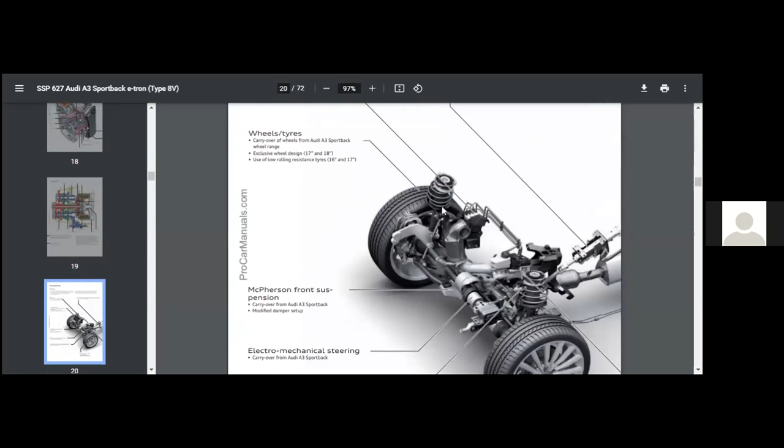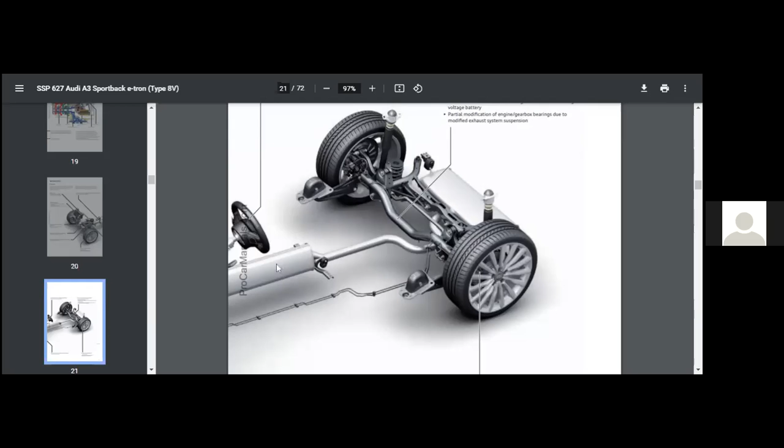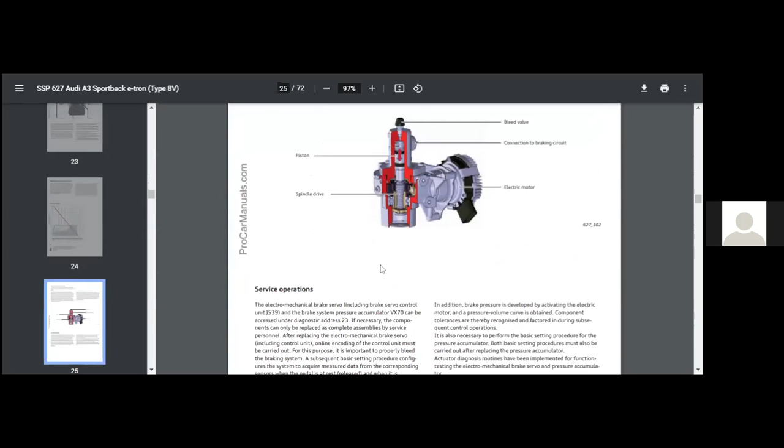This is the brake part. If you wanted I can cover it, but I just want to cover the electrical part only. So this is a brake servo unit; a bleed valve electric motor will be used.

Now coming to the hybrid high voltage battery system. As you can see, this is a very basic system, high voltage. The charging port connects to the circuit, going to the IC part, the engine control part, which controls the engine as well as particularly the batteries. There we have the engine, and power electronics will be utilized here for controlling the engine, and this is particularly for the batteries.

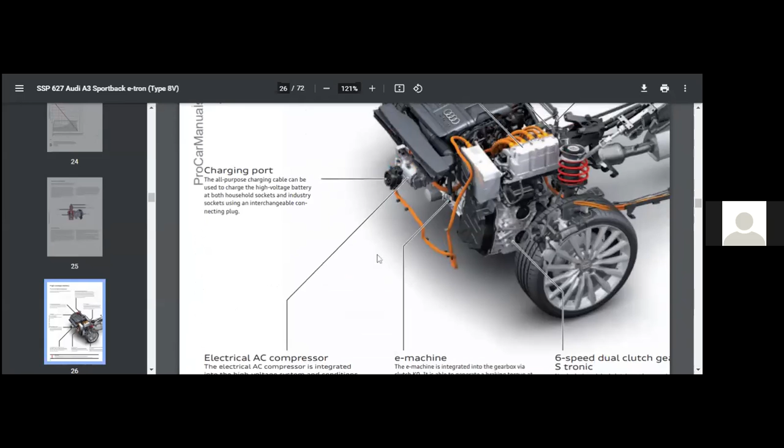And there is a brake servo, PTC heater, so it will be much more heated. Then the cooling system comes to the front. This is the E-machine as I told, for electric connected vehicles, and an electrical AC compressor will also be utilized for AC purposes.

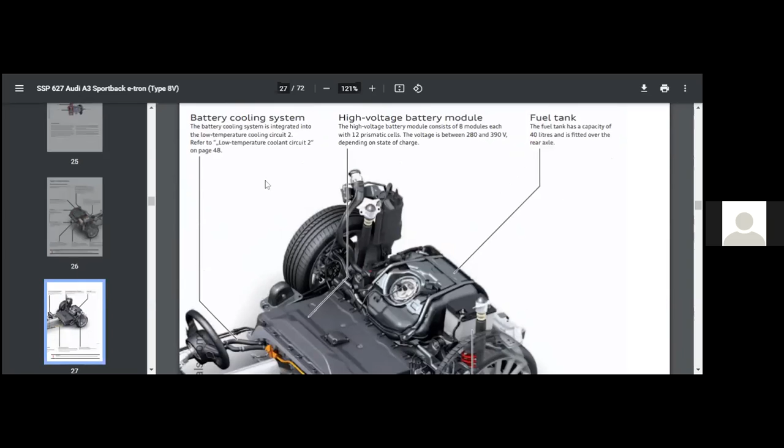This is the back end part. The high voltage battery module is installed just beyond the fuel, and here the fuel tank is located, a very low tank of 40 liters that we have utilized here. An extra battery and cooling system we have utilized to maintain the batteries at a low temperature, so it will not be heated, because once the battery gets heated, batteries can degrade, particularly affecting safety.

High voltage lines will be taken care of, and as I told, they should not be grounded. Many people make mistakes there. This is a 12 volt battery for auxiliaries - you can ground this battery, but do not try to ground the traction battery. It will be harmful and very dangerous for people.

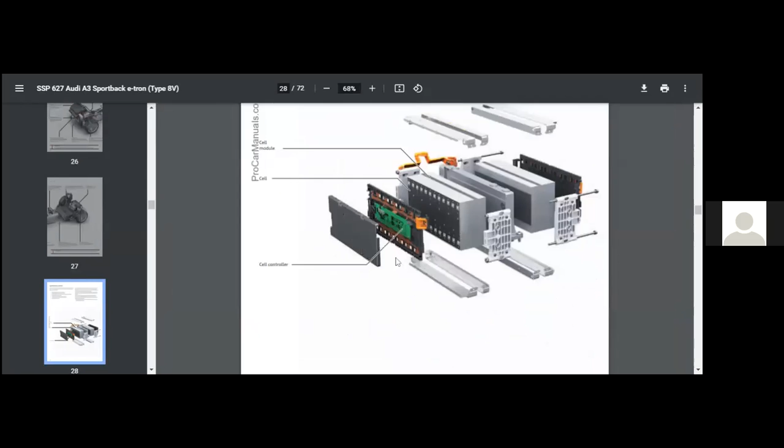Hybrid battery unit, as I told, how it will be designed - this is a basic diagram. We have cells that will be decided, lithium ion cells, and they will be formed into the battery pack. Let me cover this one.

So the cell controller is a microprocessor which takes care of all the charging, overcharging, and discharging control. It is directly connected to controllers. Here we have cells, then we have the cell module - one cell module - and various cell modules will be connected easily to various mechanical components.

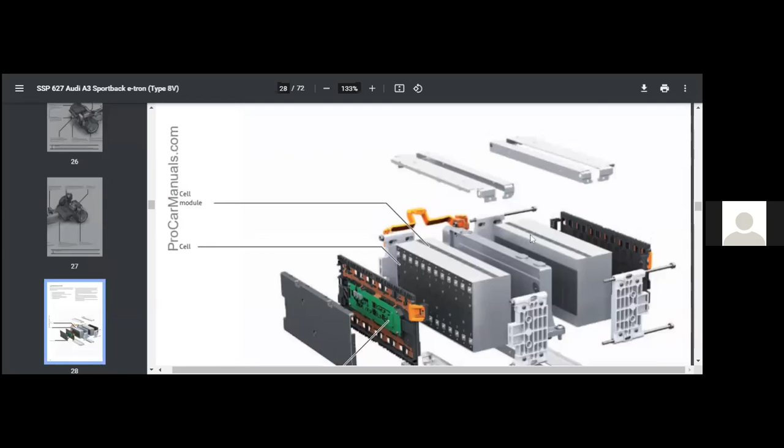Rated voltage in volts is 352. As I told, 300 volts is very high, and DC voltage is particularly very dangerous, as you have learned in 12th grade or in your graduation. Then for cell voltage, particularly one cell voltage is 3.7. Cells being utilized are 96. Capacitance in particularly one cell is 25.

Operating temperature will be utilized up to minus 28 to 60. That is because it can also operate in cold weather like in Simla and similar places. And for foreign countries, you can see the temperature going to extreme levels.

Energy content in kilowatt hours is 8.8. So this voltage of 352 will be multiplied by the capacitance, and you will find it at 8.8. Then we have usable energy content, that is 7.0, that we are utilizing, and the rest is extra. Once the battery is fully discharged, it is very difficult to come back again. Power in kilowatt - a maximum 75 kilowatt motor can be used, going up to 90, and within kg we have 120 kg.

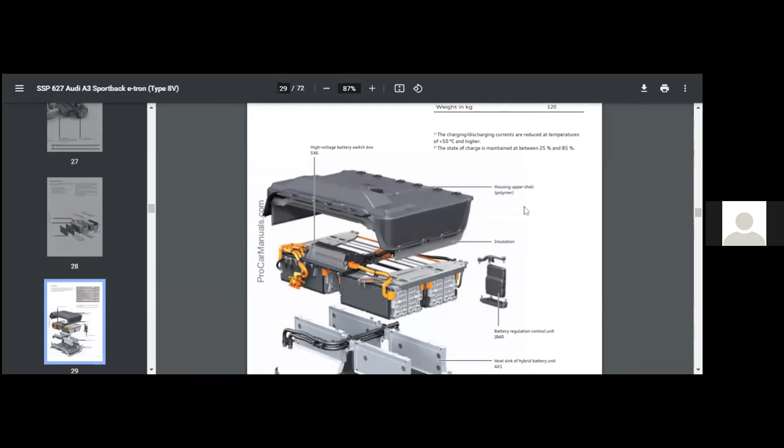High voltage switch box, as you see, this is a switch box for traction batteries. In traction batteries, we have a good insulating cover, upper cells made of polymers, and this is the insulation cover. Then we have these cells arranged, another set of cells arranged, and these are the traction batteries.

This is a battery regulation control unit. As I told, overcharging and discharging will be controlled faster at this point, and the charging circuit will be connected. This is the heat sink of the hybrid battery unit, which will be decided along with the upper housing and upper shelf castings. So this is all which I have taken for the battery regulation control unit, and I hope this is all about what we have learned so far, and you gain maximum concept.

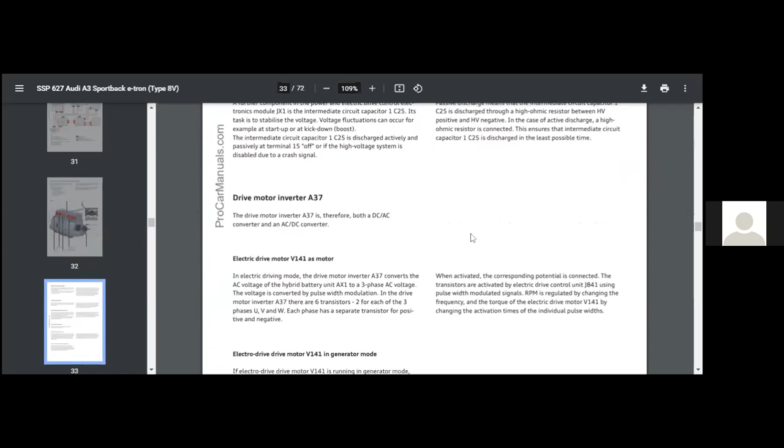Selection of motor and controller will be very much easy. Motor will be decided on two major parameters, power and torque. Secondly, the controller will be decided as per the functioning of electric vehicles, and it will be integrated with the motor selection module. This is the charging modules and all will be there. I hope if time will be there, it is a very much long SSP, but I have covered the electrical part only.

This is all we have done, how to do torque calculation, and total how many motors are requested. Now taking only the questions, and after that I would like to hand over to you. So Gaurav, only ask some questions. Okay Gaurav, now the question answers will be key, because electrical part I have already concluded. The SSP is very much long, if you want it, you can just ask.

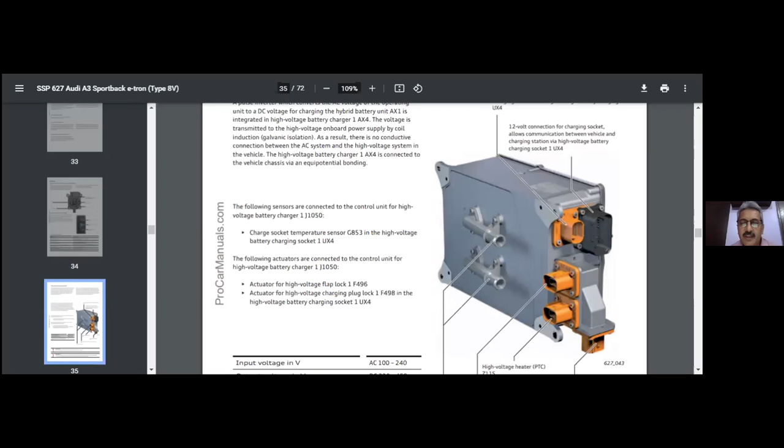Okay, okay. So with this, we come to the concluding session of today's program.

Thank you, sir, for such a nice session. It was very informative, and you explained very thoroughly the present scenario in EVs and EHEVs. You presented real world scenarios by putting forth facts and figures and throwing light on selection of motors and controllers for EV and EHV. It was really an appreciable effort to explain complex calculations in simple steps. Also, the presentation slides were very informative and self-explanatory. Once again, thank you so much, sir. We expect your presence with us in future too.